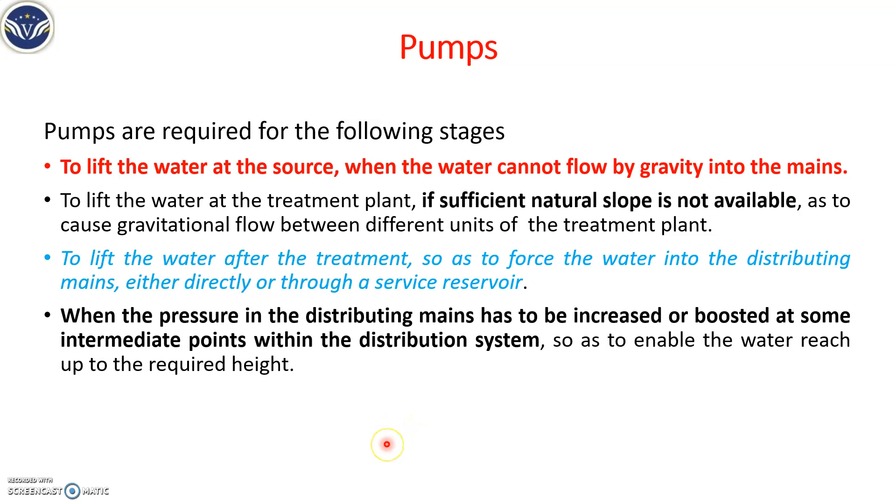So there are different types of pumps. One is a rotodynamic pump, one is a displacement pump. We'll see one by one. So what is a rotodynamic pump? It has a rotating element, or a rotating wheel, which rotates in the casing. By rotating, it imparts energy to the water. That rotating element we call an impeller.

Based on the impeller, we have different types of flows: radial flow, mixed flow, and axial flow. So what is a radial flow? Radial flow is when the water is forced in a direction at a right angle to its axis. So what is an axial flow? Axial flow is when it is directed radially to its axis. Sorry, I stated wrongly here.

So mixed flow: in that flow, the water is forced both axially as well as radially. In axial flow, the water is forced in the axial direction only.

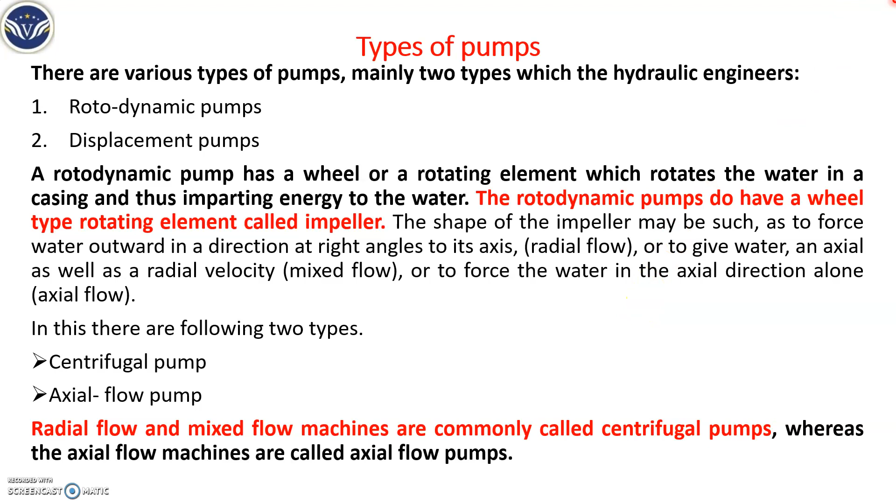Next, priming. Priming is a major factor in a centrifugal pump. What we do is put water in the casing. When you put the water in the casing, whatever air is trapped there is removed, so it doesn't hinder the operation and efficiency of the pump.

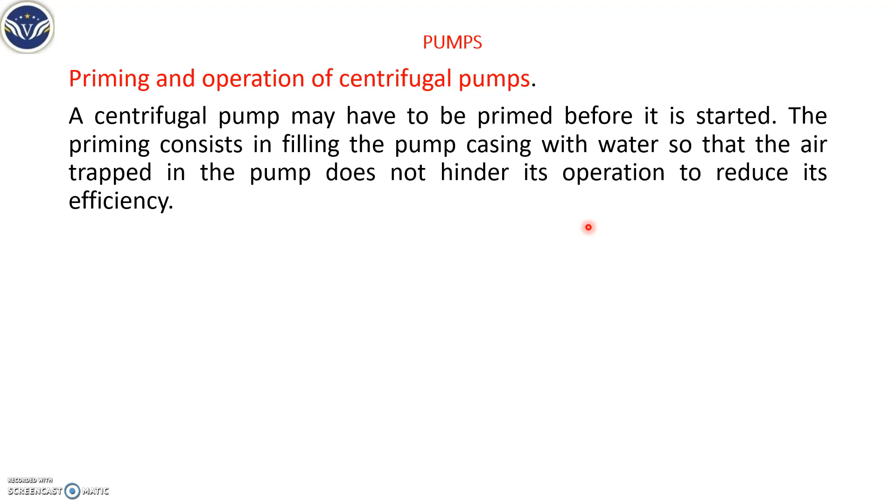Next, these are some of the advantages of centrifugal pump. It has less maintenance cost. Comparatively, the initial cost is less. It is compact, it can be easily installed, the mechanism is simple. Regarding skilled labor requirements, even less skilled labor can operate and repair it.

You can connect it to a gas engine or steam turbine itself. Again, the flow here is very much steady flow. We have seen steady and unsteady flow in EH also. When the flow is steady, there is less wear and tear of the distribution system itself.

Again, we can pump water even if it is containing silt and sand. That is why this type of pump is commonly used, because it can handle silt and sand, so there is not much effect on the pumps. We can even use it for sewer pumping, and this pump is quite durable, safe against high pressure.

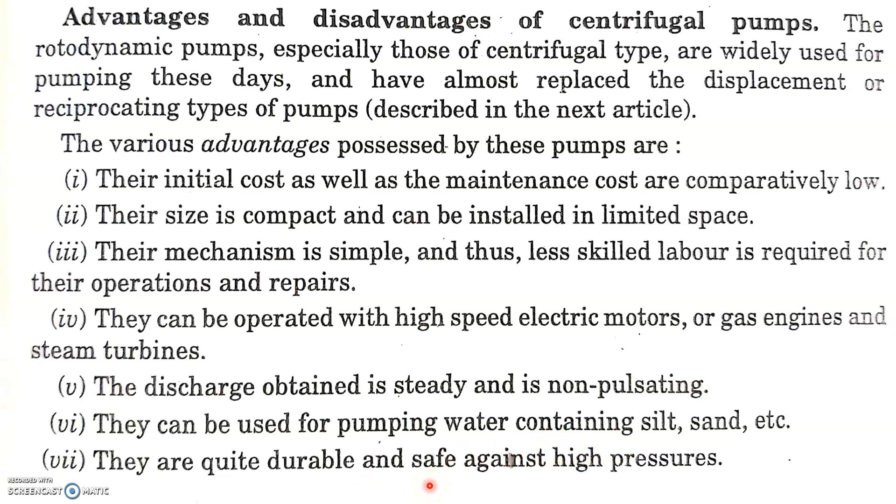Next, some of the disadvantages. There is a priming requirement. One more thing, when you start up a pump, the valve should always be closed. There should not be any overloading. When you start up the pump, the valve should not be closed for a longer time, because of the high pressure there will be breakage in the pump or in the distribution system.

So check valves are provided. It's nothing but a non-return valve, so there is no backflow of water in case of a power failure. Its efficiency is quite low. The suction lift is limited to 6 meters. If it is more than that, you need to provide different types of pump, turbine pump and submersible pump. These are special types of centrifugal pump, and their initial cost is very high.

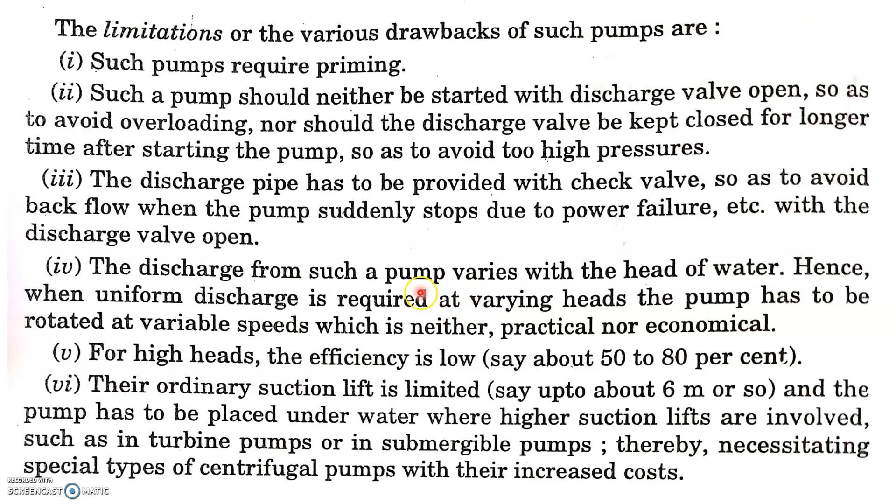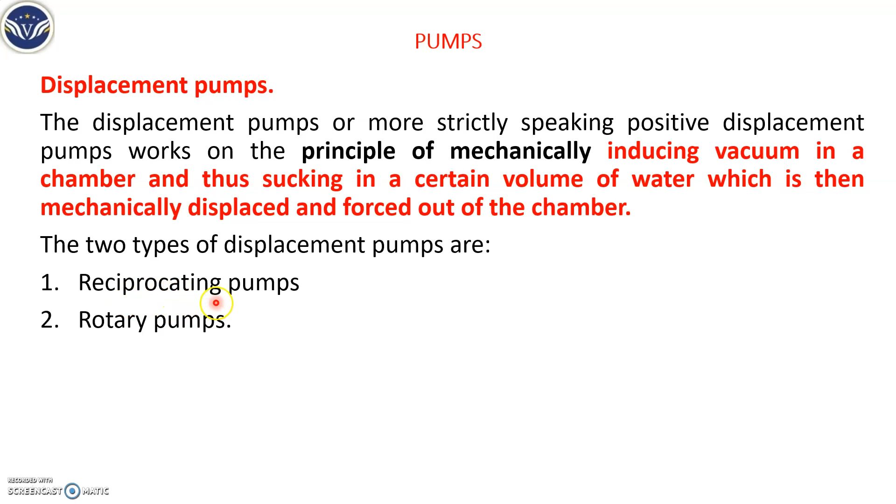And the discharge varies with varying head, which is one of the major disadvantages. Next, displacement pump. It works under the principle of mechanical displacement. It induces vacuum in a chamber sucking a certain volume of water, and the water is displaced mechanically and forced out from the chamber. There are two types: reciprocating pumps and rotary pumps.

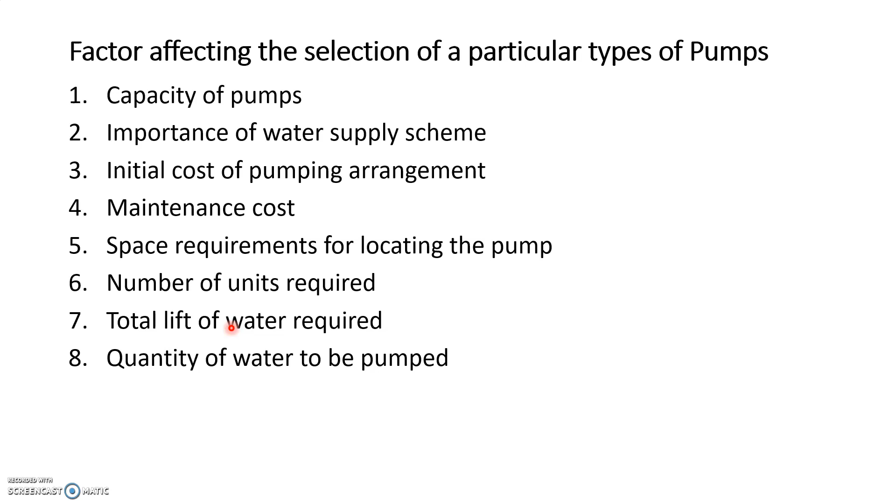Now there are certain factors based on which you select which type of pump you require. First, capacity, whether large or small. The importance of the water supply scheme. Pumping arrangement, one stage or two stage. Maintenance cost, space requirement, number of units required, total lift, that is how much head you are lifting, and the total quantity of water to be pumped.

Next, there are certain formulas based on which we calculate the horsepower. First is total head. Total head consists of suction lift, delivery head, and the losses, which may be due to entry and exit. So H = Hs + Hd + HL. You can see this in your EH book also.

Now, work done by the pump is in terms of lifting water, in terms of quantity Q in cubic meters, against a certain head H. It is given as γw Q H in kilonewton-meter per second, or it can be represented in joules per second or watts.

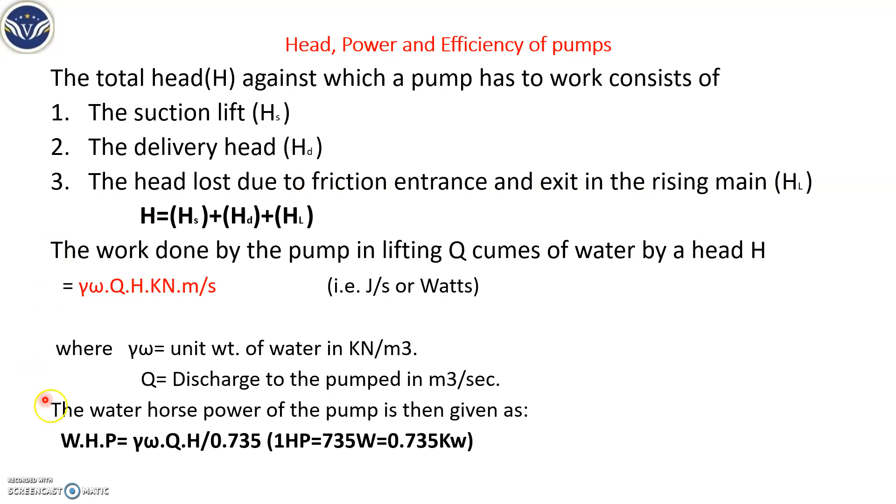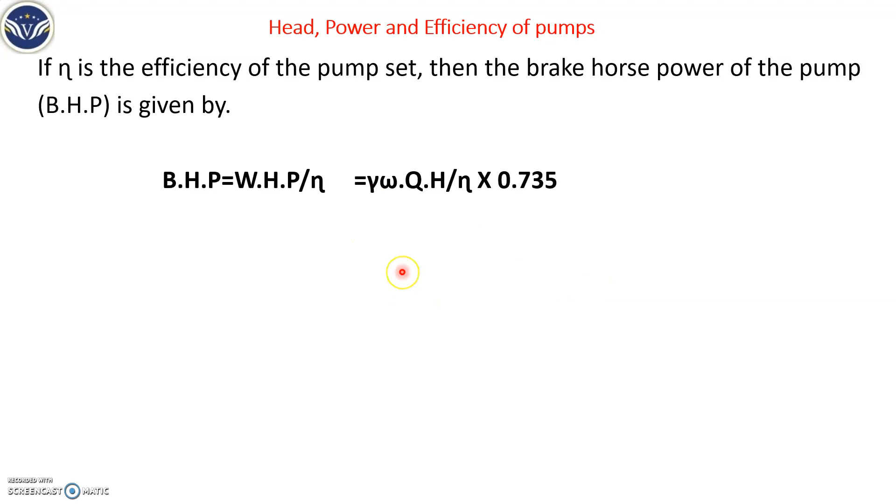Now BHP, that is brake horsepower, is equal to WHP divided by η, the efficiency. Here WHP is given by this equation, so the equation becomes γw Q H divided by η times 0.735. These equations will be very handy in solving problems.

Now, one of the major points here is called the economical diameter. We will continue this in the next video.